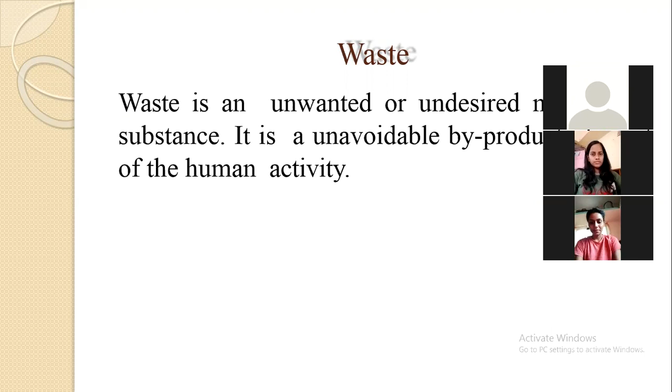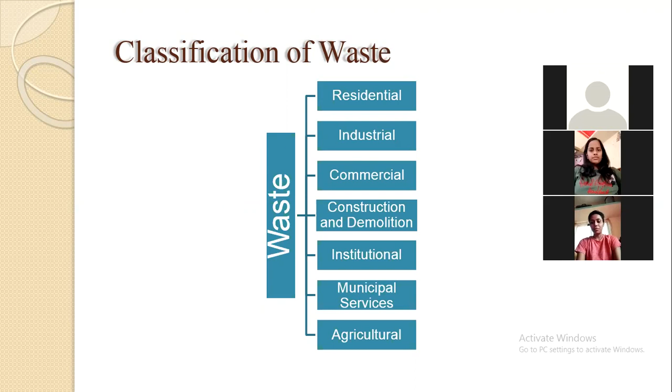Classification of waste: residential waste, industrial waste, commercial waste, construction and demolition waste, institutional waste, municipal services waste, and agricultural waste.

Construction and demolition waste: these are waste building material and degrading material that are produced in the process of construction, remodeling, repair, and demolition of residential buildings, commercial buildings, and other structures and pavement.

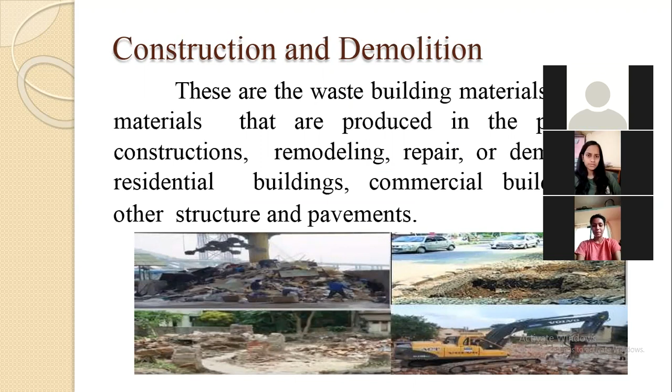Construction and demolition waste consists of materials such as concrete, bricks, timber, sanitary ware, glasses, steel, and plastic.

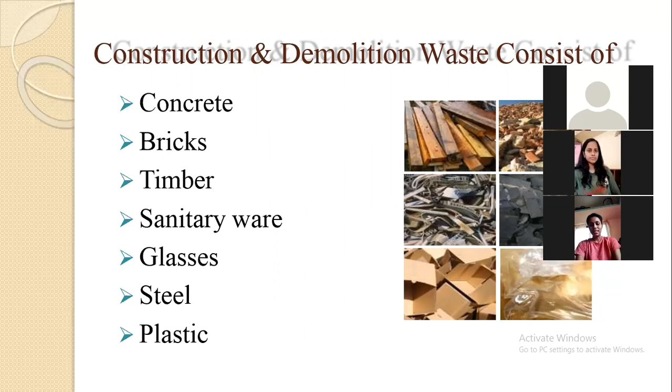Here is the present Indian scenario of construction and demolition waste: 14.5 megaton out of 48 megaton of total solid waste is generated per annum, that is per year.

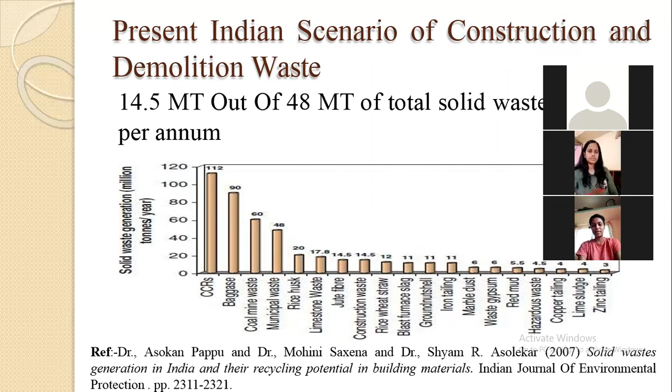Composition of construction and demolition waste in India includes 65% concrete, 25% brick and tile, 5% wood, 2% metal, 2% other, and 1% plastic.

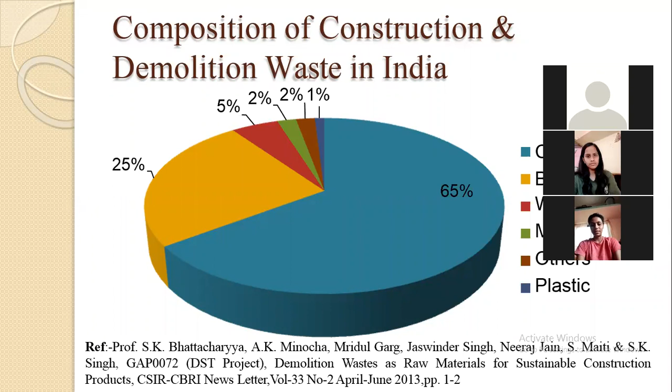Reasons for increase of construction and demolition waste: many old buildings, concrete pavements, bridges, and other structures have outlived their age and limit of use due to structural deterioration beyond repair and need to be demolished.

New structures are built for better economic growth. Structures are also turned into debris resulting from natural disasters like earthquakes, cyclones, floods, etc.

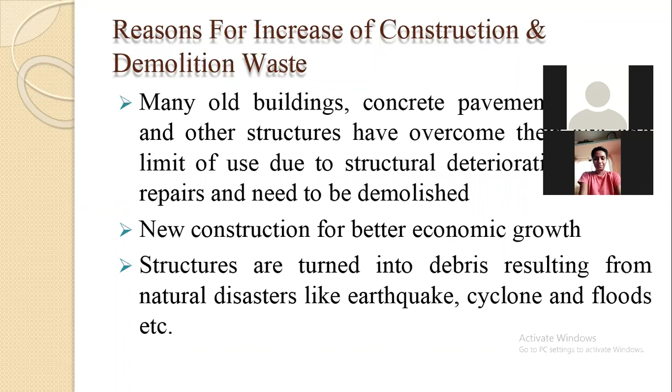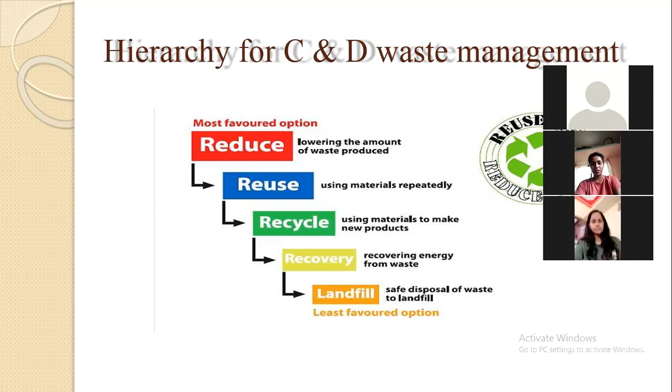Reducing waste involves ensuring materials are ordered on an as-needed basis to prevent oversupply to site, minimizing the creation of excessive scrap waste on site, ensuring correct storage and handling of construction materials to minimize generation of damaged materials or waste, and ensuring correct sequence of operations with assigned individual responsibility.

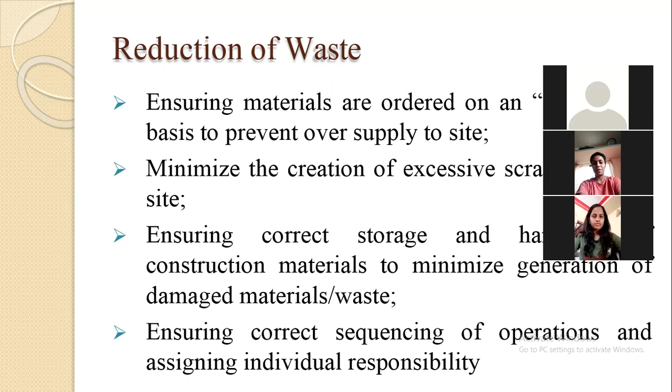Construction waste recycling: when considering a recycled material, three major areas need to be taken into account. These are: first, economy; second, compatibility with other materials; and last, material properties.

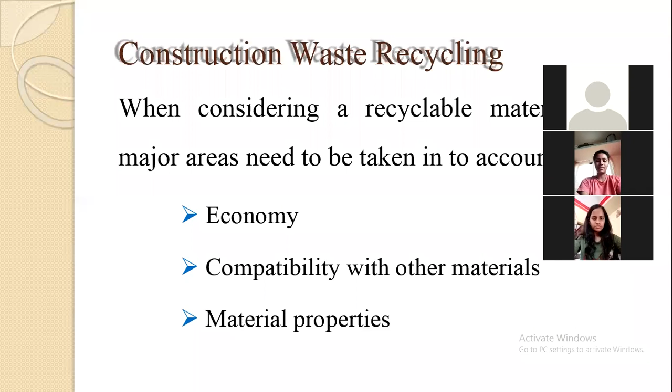Aishwarya, continue.

Sorting process of construction and demolition waste: first is chemical mineralogical appraisal, and second is mechanical sorting.

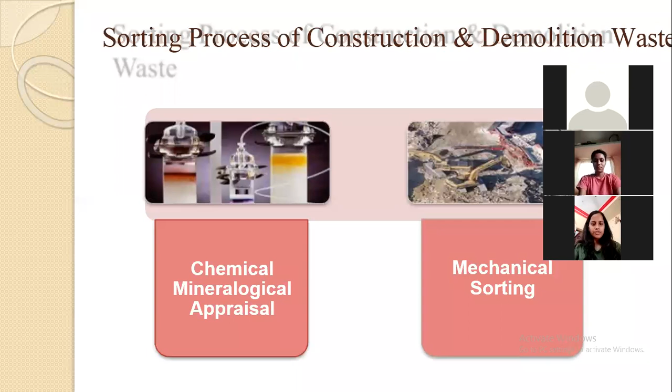Chemical mineralogical appraisal recognizes particular grain size using X-ray fluorescence, investigating chemical composition in terms of major elements, and X-ray diffractometry, which recognizes the constituent mineralogical phases.

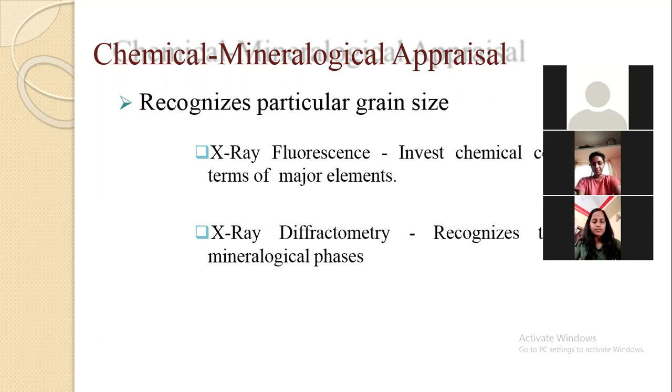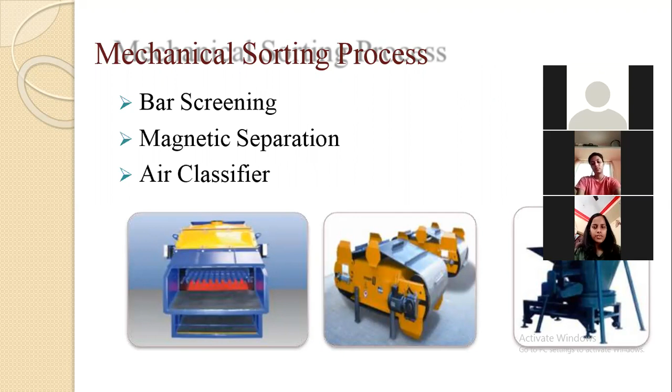Mechanical sorting process includes bar screening, magnetic separation, and air classifier, as shown in the figure.

Recycling and reuse: reuse of bricks, stone, slabs, timber, conduits, and pipe building, etc., to the extent possible and depending upon their condition.

Second, plastic, broken glass, metal, etc. can be used by the recycling industry. Rubber, brick bats, broken plaster, concrete pieces, etc. can also be used for activities such as laying under pathways, where the material does not have to sustain moving loads.

Key requirement of waste management plan: the types, quantities, and qualities of waste.

Second, measures for reducing waste generation, on-site waste sorting, on-site and off-site reuse, areas for waste storage, quantities of waste requiring off-site disposal, and a monitoring and auditing program.

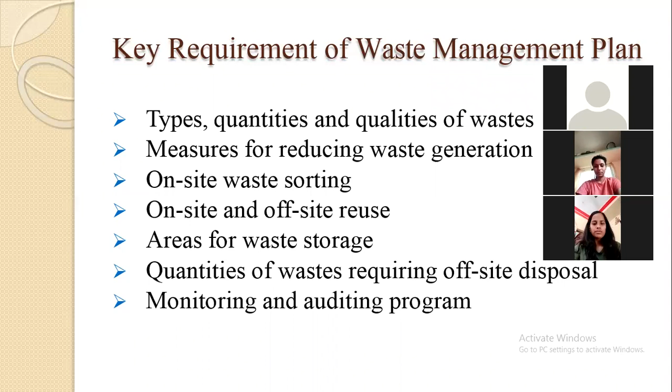Conclusion: it has been established that materials and components from demolished buildings are being reused for new construction works as well as renovation projects, especially by low-income communities in developing countries.

In developing countries, most of the demolition rubble is dumped. The developed world has now started to recycle it into aggregate for construction.